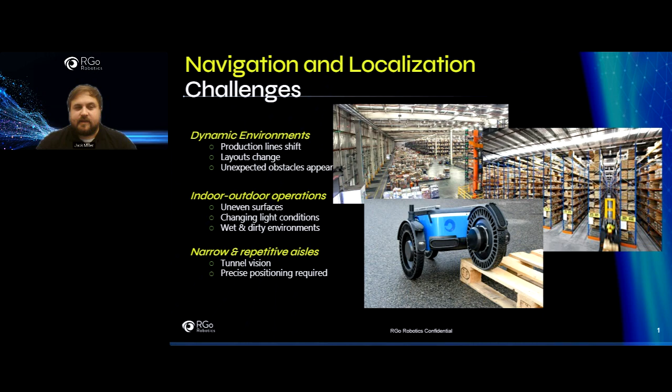It's pretty cool. It's worth noting that all of the floor-staged product in the image on the right is work-in-progress staging and is constantly moving throughout the facility, day by day, hour by hour. I'll get into the video here that shows the vehicle operating in this environment. Anyone who has spent time designing, deploying, or even buying traditional LiDAR-based mobile robots has surely encountered the not-enough-static-features problem that this highlights.

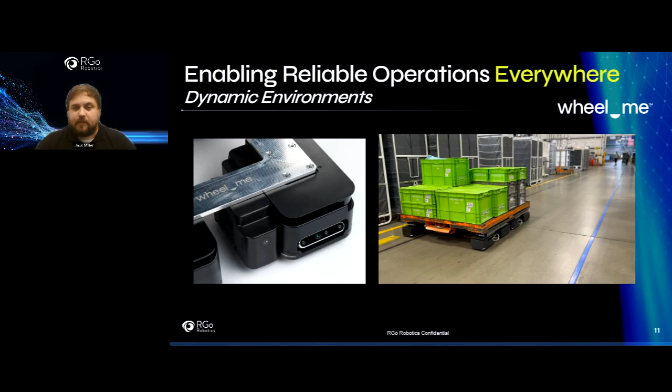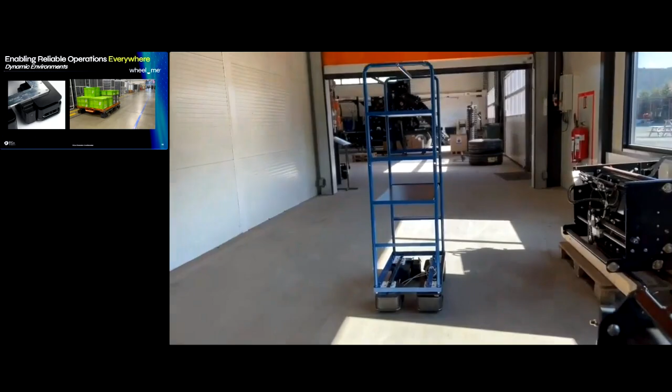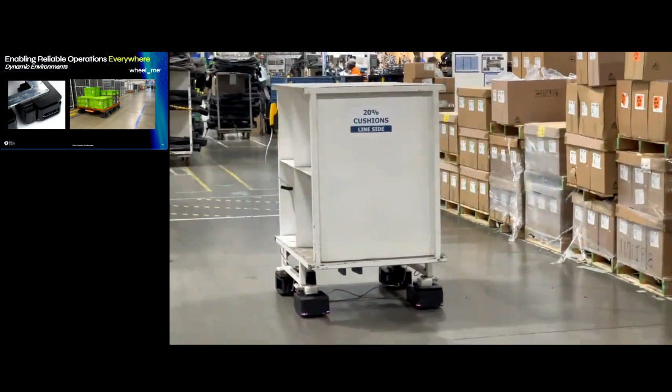As I play the video here, you'll see several environments where changing features is a very common aspect of their applications. You can see there's product on either side of the warehouse in that facility, all sorts of different configurations for their mobile robots and platforms. Very dynamic, very adaptive, needing a lot of support from a localization perspective in order to accommodate some of these very challenging environments.

It's worth noting that RGo wasn't the only system WheelMe had investigated for localization. In fact, Visual SLAM wasn't even the only technology considered, but we were the winning solution. These are some of the reasons why WheelMe believes in a partnership with RGo: no need for remapping, and we have an experienced team working full-time on perception and localization. Some of their end customers had very direct quotes saying that with RGo, no more drunk-driving behavior was present in their robots, the robot localization seems way more accurate, and RGo seems like a real game changer for product performance.

And with that, I'll hand it over to Alon to discuss indoor and outdoor use cases. Thank you very much, Jack. Hi guys, my name is Alon.

I'll walk through the next one, which is indoor and outdoor operation, which has become more and more in demand for today's mobile robots. This environment's characteristics and use case, the environment changes dramatically. The surface can be from gravel to pavement to grass, all the way to snow. Lighting conditions and uneven surfaces are definitely challenging robots to navigate accurately within the environment.

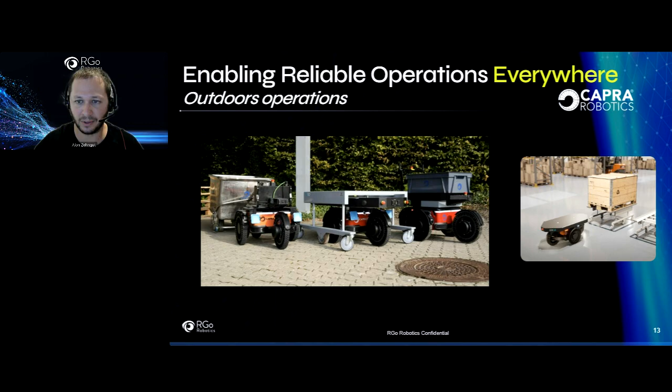Niels was the former CEO and one of the founders of MIR, Mobile Industrial Robots, and he's the guy that actually created Capra Robotics. He said RGo is continuing to develop game-changing navigation technology, emphasizing that traditional localization sensors can do either indoor or outdoor, but not both. RGo Robotics, by combining those capabilities into a low-cost, compact, and robust system, was a key aspect of their strategy for succeeding in the market.

In the next video, you can see a very nice example of how this product is utilized and deployed in the market.

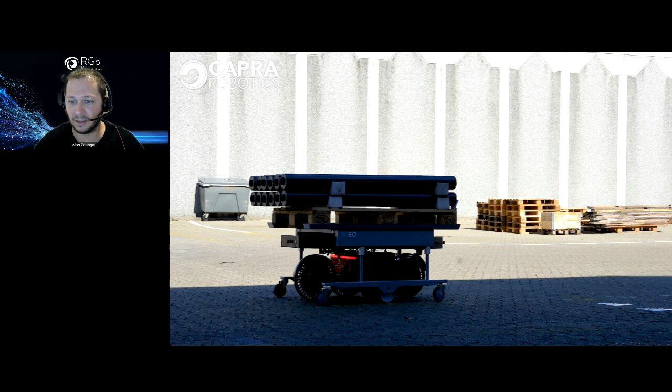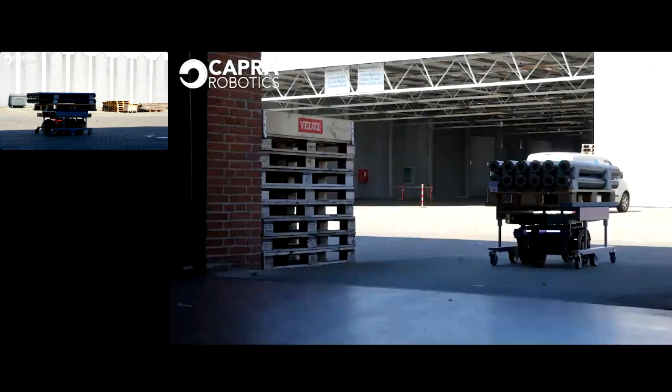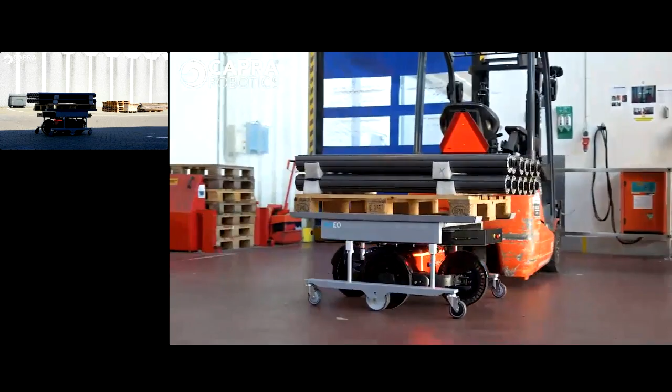So you can see the Capra robots navigating outdoors, between different sites, carrying a load. You can see it can go all the way from the outdoor environment into the indoor environment seamlessly, continuing its mission and approaching a picking station, which requires very accurate navigation skills. That's implemented with a single monocular camera facing front and additional IMUs for the RGo perception engine.

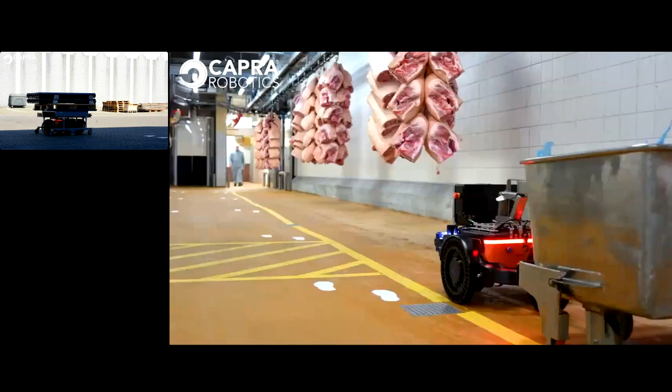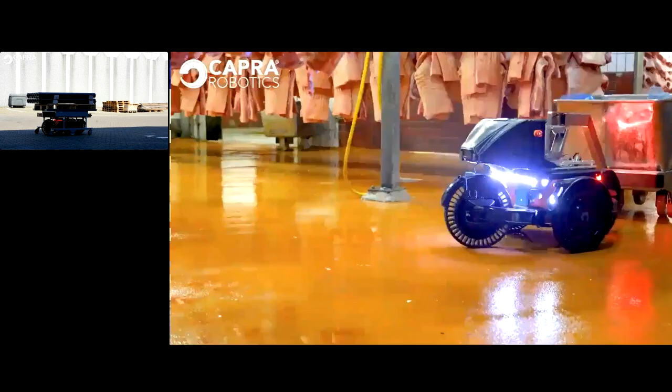They had a very extreme use case working with a wagon in a slaughter warehouse. You can see the floor is completely wet, and the site itself has a very challenging environment—that's extreme. The perception engine really makes the robot work seamlessly over there.

Let's stop here and move to the next challenge, and let's hand it back over to you, Jack.

Thanks, Alon. So the next challenge that all mobile robots encounter at some point are repetitive environments. We recently announced a partnership with Onward Robotics, and their use case takes repetitive environments to a whole new level. In many mobile robot applications, there's typically one, two, maybe three areas classified as repetitive or featureless. Think of a long stretch of path along a featureless wall or down a long aisle of racking on both sides.

Well, for Onward, that is the environment they live in day by day. Their facilities are large grids of shelving for order picking operations, environments that all look identical to a 2-dimensional LiDAR, which often leads to a tunnel vision effect where most mobile robots lose localization or have pose jumps quite easily. Now, a traditional 2D LiDAR approach would be to add infrastructure to the shelving to provide a certain uniqueness to recognize and guide off of. But many of the aisles in these facilities are quite narrow and don't have the option of adding infrastructure.

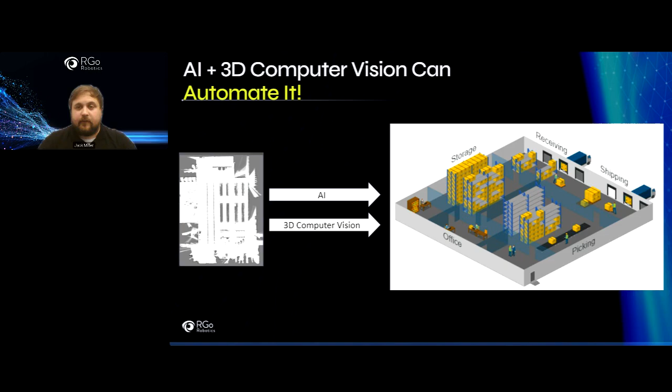So our claim is that AI and 3D computer vision can ultimately automate this map cleanup process. And so we'll get into the foundations of that claim in some of our current features and features in development coming up here with Alon.

Thank you, Jack. So let's talk about site commissioning, or how we're learning a new site with RGo Perception Engine. So a few facts about it. The site exploration or the mapping phase needs to be done once. So there's no need to remap or readapt the map if the facility has been changed. This is done automatically over time with continuous updates to the map, which reduce a lot of time and hiccups for the system. The map doesn't need any post-process or manual cleanup, as Jack mentioned. It's automatically post-processed and ready to use within minutes. Then the map can be shared with the entire fleet.

And maybe one of the top priority facts is there's no need to stop the operation of the facility. So sometimes with traditional 2D LiDARs and other technology, if there is a pallet in the middle of the floor or some forks that may obstruct, they need to be cleaned up or removed. With RGo Perception Engine, you can map the site without interrupting the day-to-day operation, which saves a lot of runtime for the facility. And of course, it goes for both indoor and outdoor.

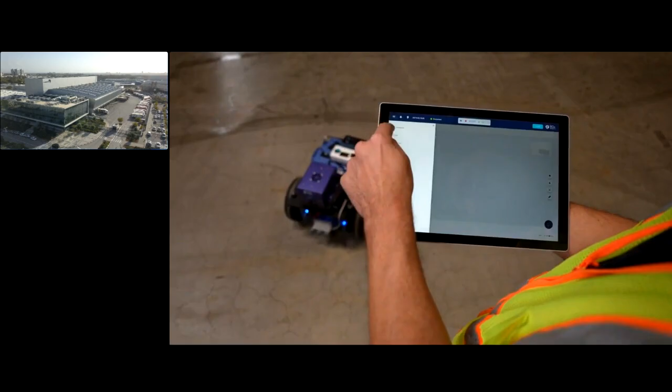Let me try to demonstrate a little bit how it looks in one of the test sites we have next to the RGo offices. So this is a typical logistics center where you can have those racks outside, and you can see the environment is changing. So there's pallets here, and there's some typical racks on the other sides. And to start with, a first calibration needs to be done. And when I mean calibration, we just need to measure where the camera is positioned in relation to the robot. And that's done once when you come to the site. It's very easy with the intuitive UI, as you can see.

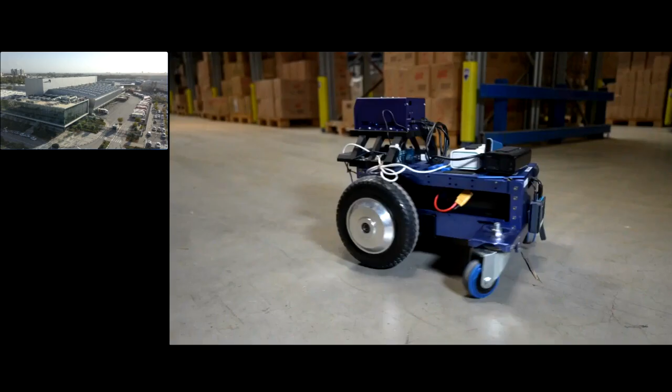You can just create a new site, create a new map, and just turn the robot in place where the robot automatically detects how it's positioned in relation to the robot. And then you can go straight away, get accurate position and mapping without going into complicated calibration processes, such as for systems today. Once you're done with the calibration, all you need to do is travel with the robot and see the site, because we're a camera, we need to see the site in different perspectives. And the minimum is just 2 perspectives. So going down the aisle with 1 perspective, going back and forth, the second perspective, and there you go. Once you finish and cover the aisles, you have a ready-to-use map, ready-to-use mission, and you can start operating within this warehouse.

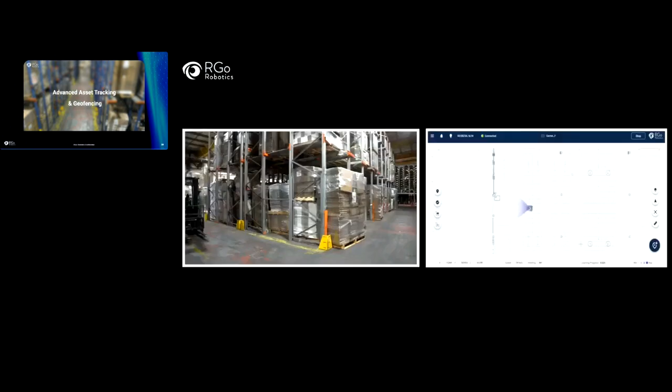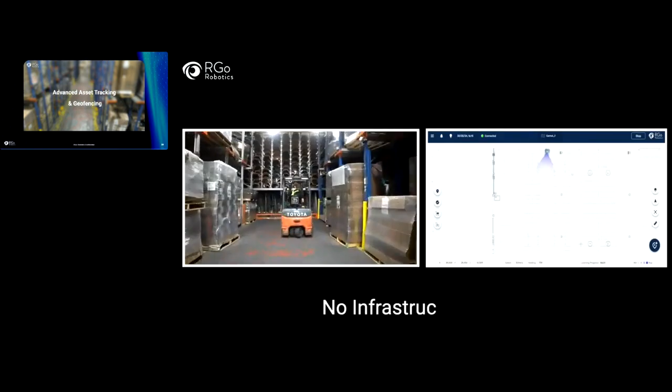Maybe another example that we use sometimes for forklift tracking applications is the ease of use of a blueprint or a CAD drawing of the site. And this is one of the examples where a forklift just traveled the warehouse once and mapped the site. Then we use our UI to align the blueprint of the facility to the RGo coordinate frame. And there you go. A few minutes after, you can see the live position of a manned forklift or autonomous forklift on the blueprint or the CAD of the site itself. Makes it very intuitive and very easy to start working with.

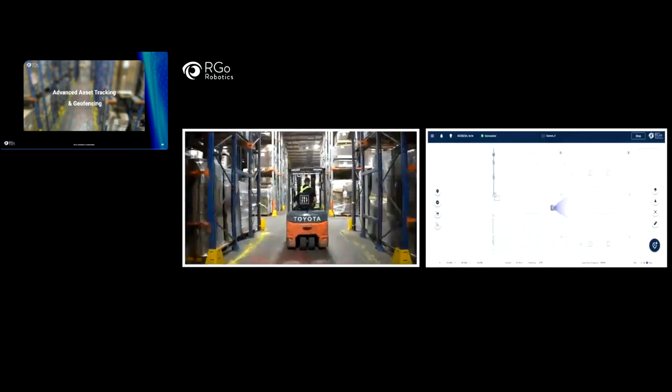The next chapter will concentrate on the foundation and AI, and that leads me straight away to Jack. Thanks, Alon. So the simple fact is that precise localization and computer vision are foundational to the use of AI in mobile robots. With our learning-based VSLAM, we're already blazing the trail of AI perception capabilities in mobile robots. And we'll get into some of the features that we've been developing in this regard as well.

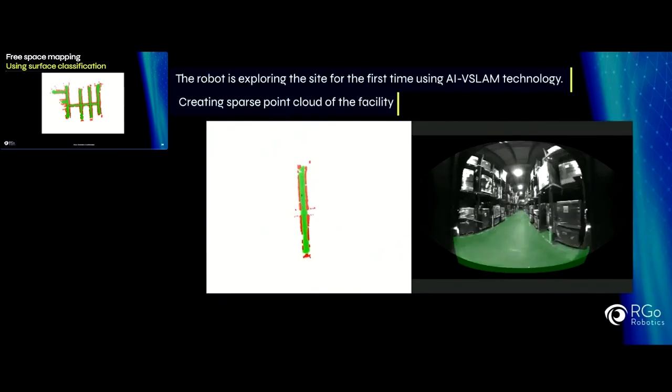Thanks, Jack. So back to mapping. We already showed you how we map with our monocular vision and create a nice data structure of a site. But now when you utilize deep learning algorithms and training mechanisms, you can map a free space site using the single monocular only. So what you can see in the video on the right part is a monocular monochrome camera that actually detects the surface. So it has a surface classification algorithm, and with the accurate position and the surface classification, it will create a full global free space map of the site.

What is nice to add to this one is the ability to detect and classify objects within the image. So we spoke about free space by utilizing the surface, but what about these objects? Using a camera-based technology, you can see objects such as pallets and loading gates and storage areas, detect those in the images, and then with accurate position, overlay them on the map, resulting with one quick scan in a ready-to-go map with a lot of annotation and information ready to plan and deploy your mission in no time.

All right, and so now that brings us into one of our other features that is using generative AI. This is the RGo Insight Engine. It's a feature we've been developing recently to use large language models and visual-based data to provide operational insights to end users of our product. So as I play the video here, you can see the image on the left shows the layout of the facility, while the right side provides a query field along with corresponding image and response descriptions for a location that matches the query. We'll get the video started here now.

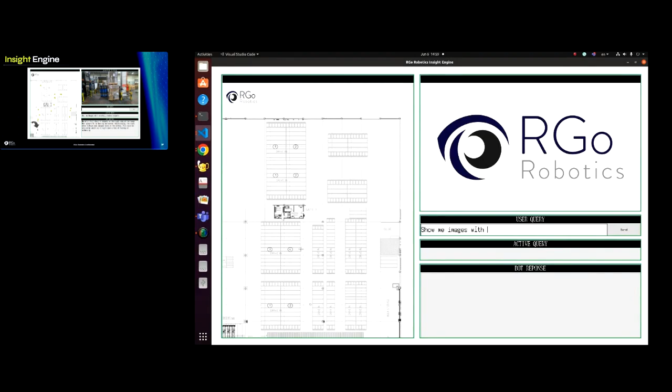So what if you could ask your forklift insights about your operation? What are some of the things that would be important to you? Now you can see here we're typing a query into the Insight Engine. And once the query is submitted, all the little yellow triangles on the facility layout to the left show the location and orientation of the RGo system where a matching query event occurred. So in this particular case, we're looking at unsafely stacked objects, right? And you can see the image that corresponds with that location, as well as a description below that describes what is actually happening in the image.

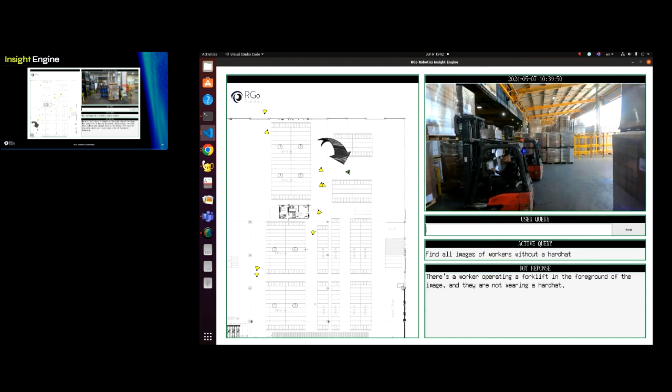Right, so now we're talking about PPE equipment for operational personnel. So it's all a matter of what is important to you, what is the visual data that you would like to unlock, right? And then as these language models develop and continually iterate, it's only going to become more and more robust and more precise for whatever your actual needs are. All right.